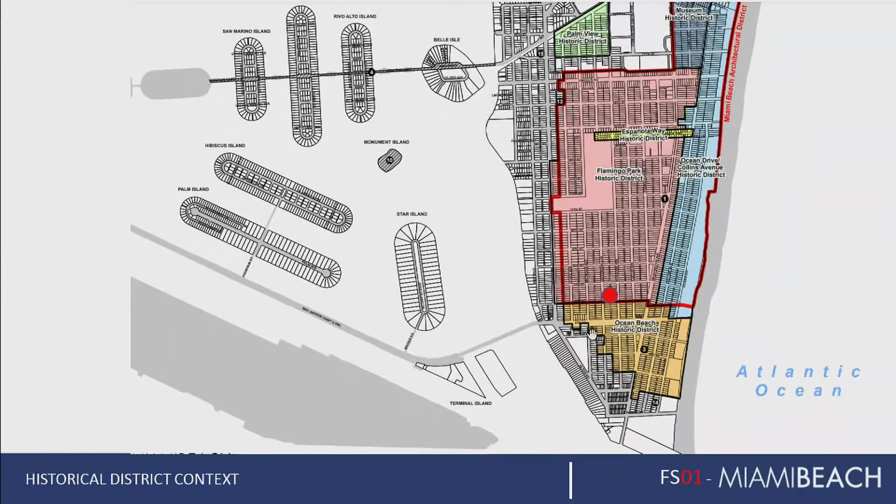Going back through this proposal, obviously the location falls right in between two different historic districts with Ocean Beach and Flamingo Park, right on the edge. Looking at characteristics within the neighborhood, we analyzed some of the contributing factors, but most of the references are directly from the site that we are using for our building.

From a site plan standpoint, this is the existing site. You see the location in dark gray of the existing building, the parking, and the access to the alley - that is all existing. Some of that alley access is remaining in place for the new project.

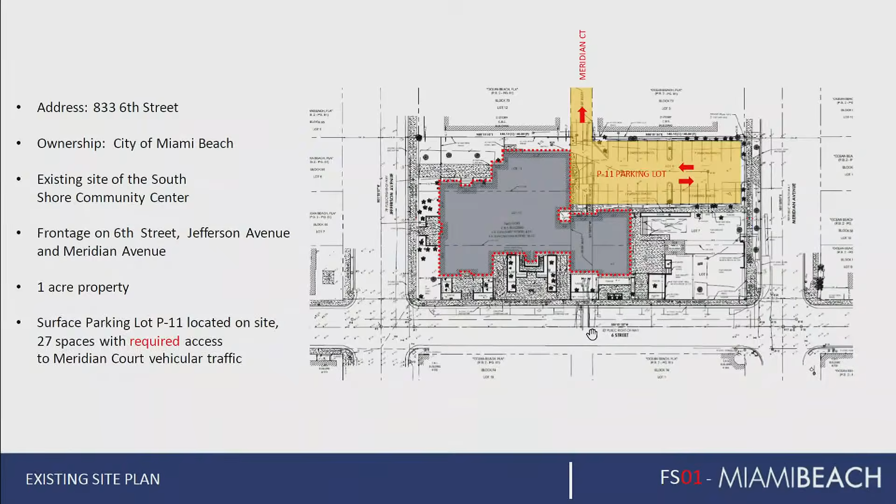Going specifically into the design elements, some of the details that are going to remain - we have some board-on-board detailing for the concrete stair railings that's going to be reimagined within the new building.

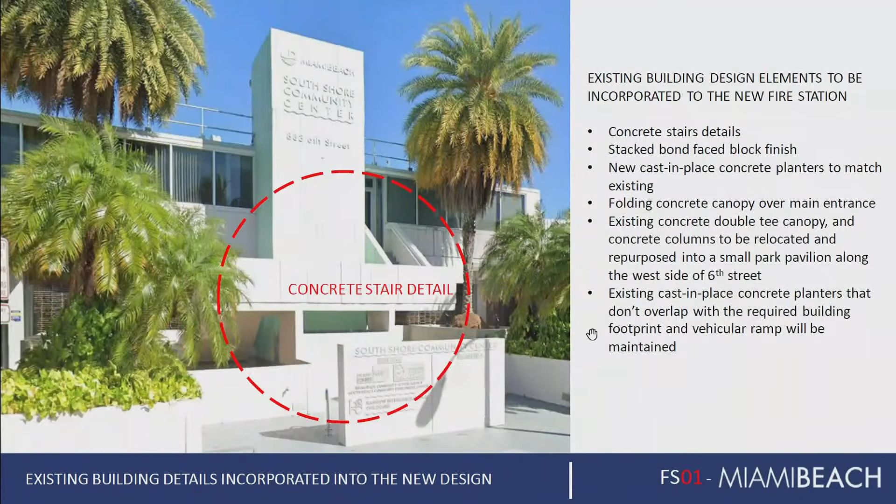We have stacked bond, we have the planters - a lot of these individual elements that we are maintaining or relocating within the new site. This is highlighting one of the planters; there are multiple planters along that row. I think that is really one of the contributors to the walking experience, so we're paying lots of attention to keeping that, including protecting some of those elements during construction.

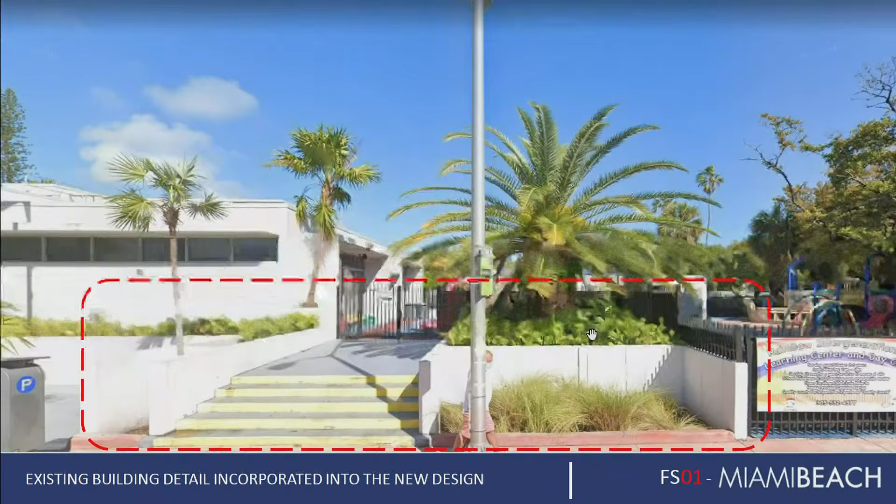Some of the structural elements, the double T's and how that's being held, are going to remain on site. We're actually going to relocate one of those and make a shelter out of that structure. And then in the rear, you can see some of the stack bond - we're going to use stack bond within the new structure and some of those unique planters.

Some of the shadow box, folding, concrete detailing, we're going to use that again in the same way to highlight the entry and highlight some of the window structures. And here you see in the renderings, some of those either relocated or maintained planters and the entry structure.

But on the left, in that structure, we're actually making a pavilion and a pocket park essentially on 6th Street. That's an opportunity that we can continue to develop with information about the original structure, but also potentially about the department. I think that is a community process, but we have some seating and some landscape that is going to buffer that area on the left particularly.

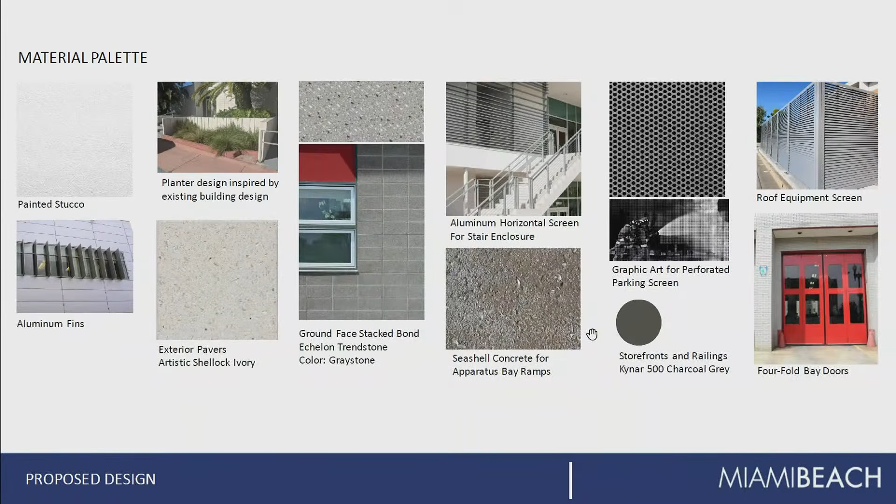Some of the materials being used: the brise-soleil, the planters, pavers, the stack bond is a ground face stack bond, so it doesn't need to be painted in the future, repainted. One of our sustainability factors.

All of the mechanical is going to be hidden from the neighborhood, and the one new aspect is the red fire doors. For that, another unique aspect is on the ground level, there's a perforated art piece integrated into the station as part of the entry sequence. That also shields any of the parking below the building so that you don't see that from the street.

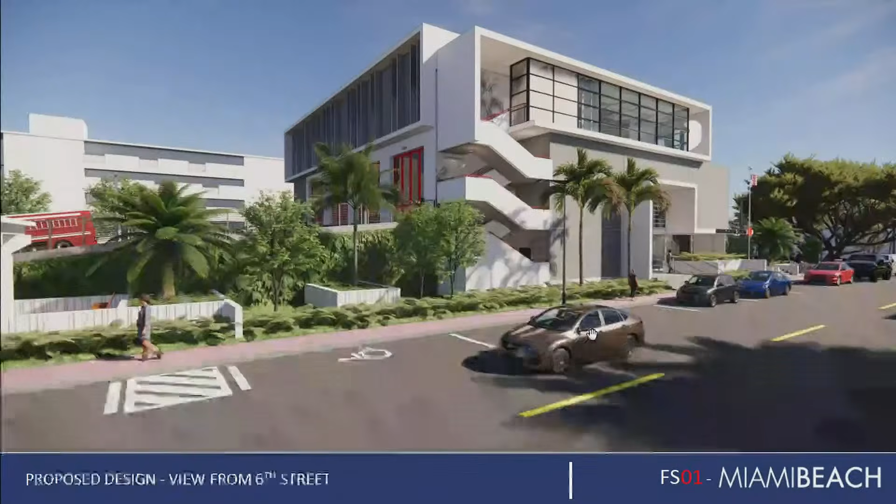From a water standpoint, we have 5 deep wells on site. We're vastly improving the water treatment on site, vastly improving the landscape on site. Currently you don't have any of that, so after this is completed, we will have a much better treatment of water and capture of water on site. Enhancing some of that landscape along 6th.

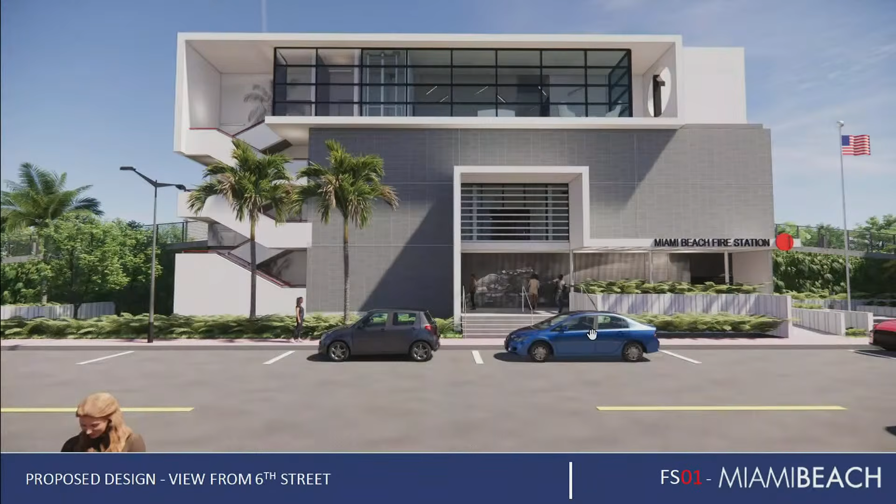You see some of the detailing in the stairs. You see how the shadow box around the entry is enhancing in a similar way to the original building, focusing on the entry into the elevators, and then that stair on the left-hand side, and the shadow box increases over the stair on the upper level as well to enhance and capture those windows.

See, you're looking to the northeast at this view, up 6th. And to the left, you see that pocket park where we're reestablishing that entry and recapturing some of those details.

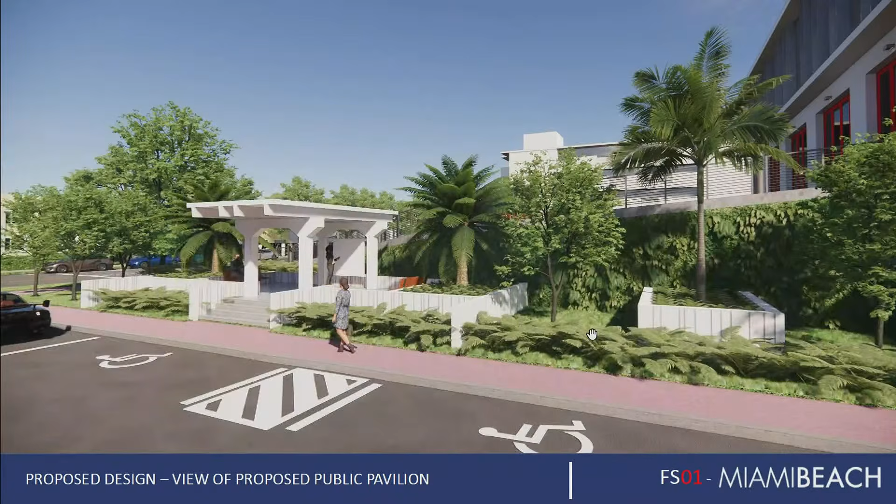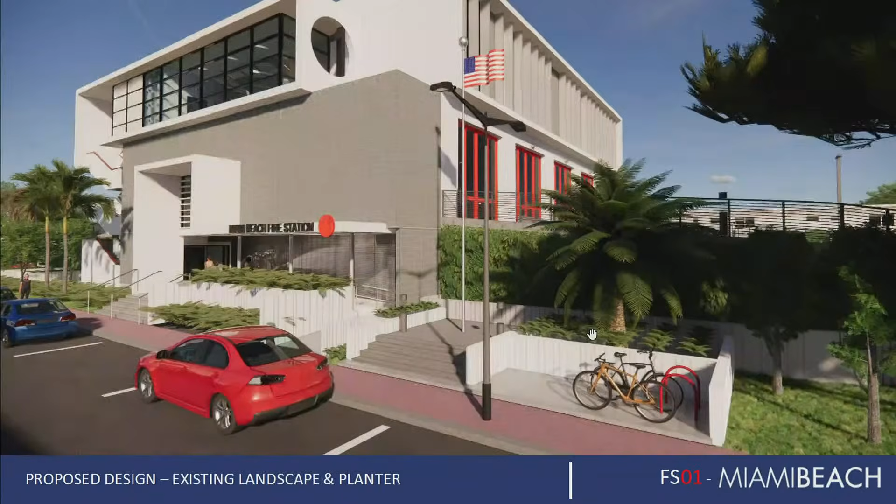Through the entry, you see that perforated material that hides any visibility of front to the parking lot. Some bike parking. The final entry. Some of the signage we're holding and capturing single letters with the signage on the brise-soleil.

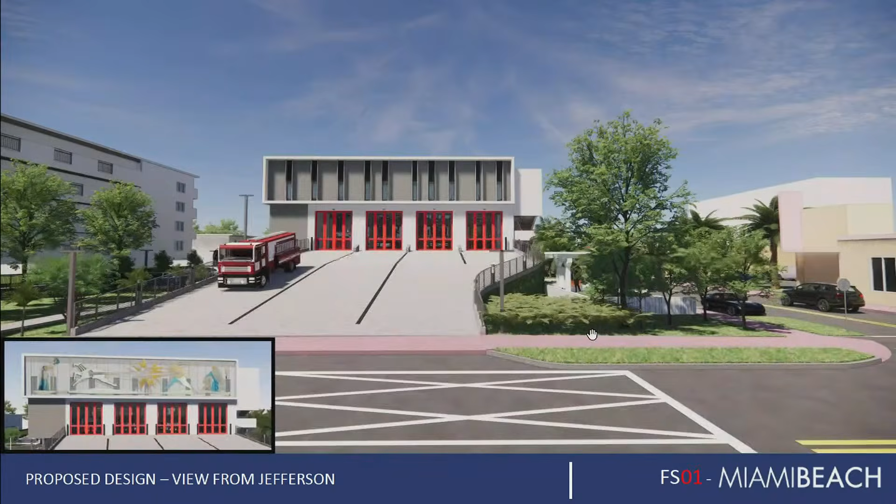And then this is looking southeast. So this is from Jefferson, and then highlighting to the left doesn't really capture the full view until you see the Apollo on it. But since these are two applicants, we'll show you, get deeper into the Apollo mural in a minute. And this is a bird's eye view from Meridian.

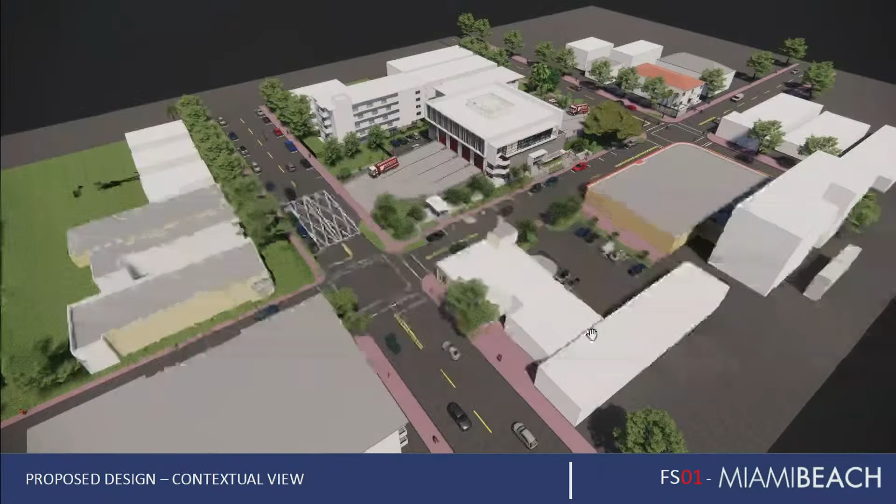If you were behind the building - we are not - there was a conscious effort to not be the back of the building, so we're looking to treat the building from all sides, using stacked bond again in the back, and then you see some of the access to the parking below. Bird's eye view of the whole site, and the front view.

So I'm just going to go right into the Apollo mural, since these are originally two different applications. We're excited as a team to be able to capture this. The size of the Apollo mural happens to be almost exactly the size of this building, so it was almost like it was meant to be relocated to this site.

So looking back at the history of Jack Stewart, accomplished mural artist, he actually invented new techniques for stained glass and mosaics, and I think that has allowed his work to really endure, both physically and visually over the test of time. He was a Yale graduate, also went to Columbia. He's worked in many different mediums, but obviously mural was his highlight.

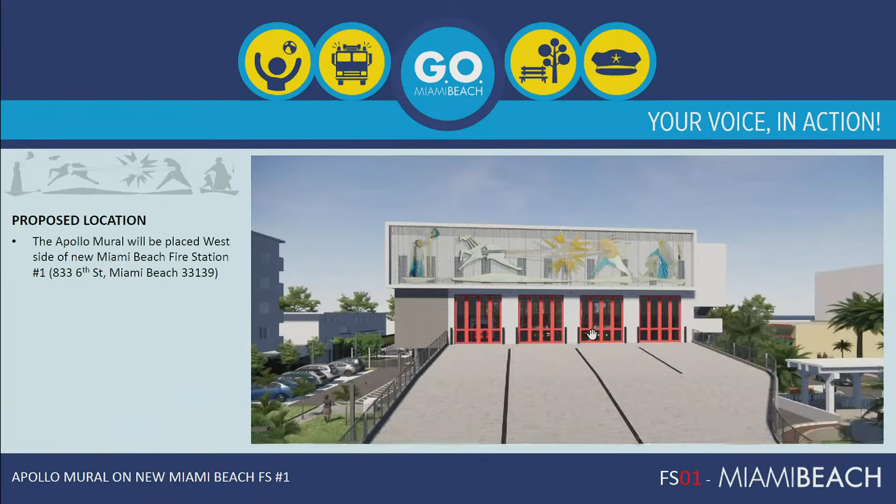And obviously there's meaning between the Apollo and running the chariot through this site, and the spacing and all of the original spacing and the sizing we're able to accommodate. So even though these are multiple pieces, we're able to suspend it as it was originally intended.

So it will be on the Jefferson side, so it's on the west side. I think that's important because you get north light versus south light, so it protects it a little bit more over time. And we're suspending it in front of the system, as it was originally suspended. So we have a frame system, essentially a perforated backdrop to it, so we get a nice clean look. We still do need to have some windows on that facade for the interior spaces, but we put the perforation to give us a clean slate backdrop for it.

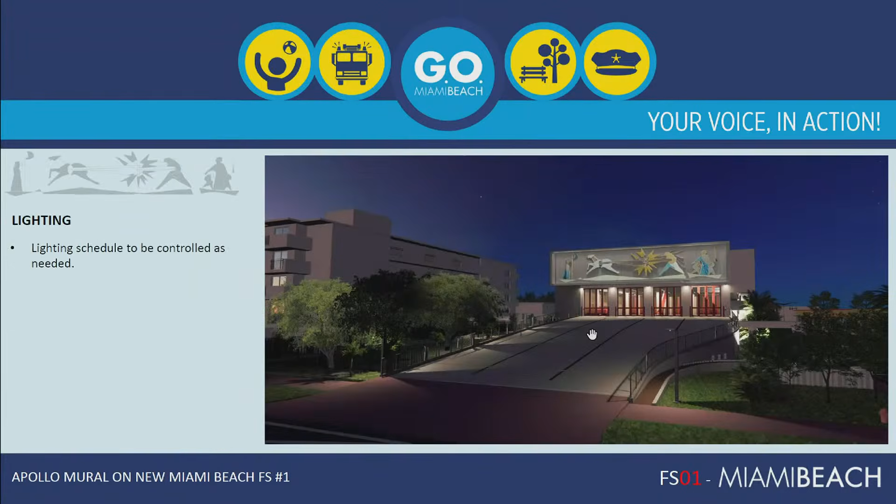We stand it off of the windows, and then we have a lighting system that's going to come in front of that to make sure it's seen properly in the evening. I think that will actually be the best time to see it. It's really fantastic. And the elevation of it, you'll see it as you drive down near this location, so it will have that elevated experience. The final sunset view.

So that concludes our application. I think we're excited to bring this project back to life. There's been a lot of effort gone with the board in the past to make tweaks and additions to this. They were made both in the landscape. We revised the railing detail. We incorporated some of those original materials, and capturing some of those original building elements were all things that you all brought to the table.

We in the city implemented, and we're proud of the outcome. Thank you. Are there any questions for the applicant? I think there's a comment you'd like to make that will amplify the application for us, and then we can have questions for the applicant.

Yes, thank you, Mr. Chair. I've cleared this with staff. I'd just like to make a little presentation on Jack Stewart's Apollo mural, Apollo driving his sun chariot across the sky. On the right, you'll see images in a short media presentation.

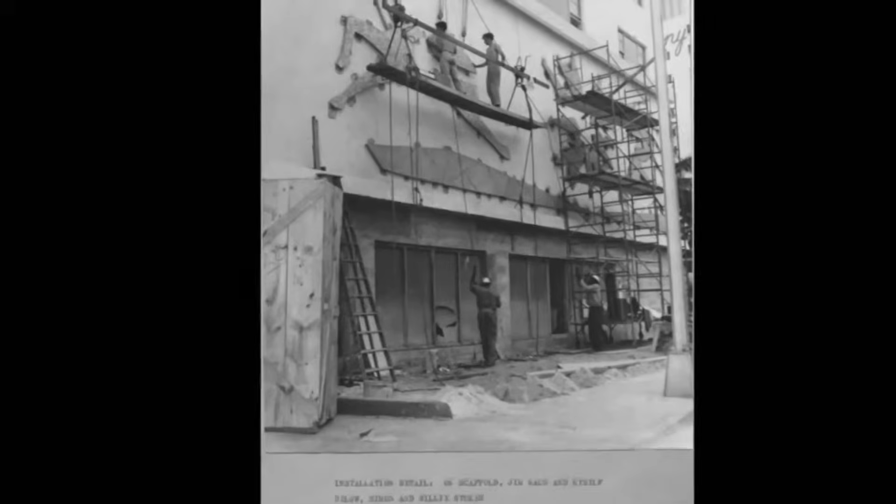Don't. What's the neighborhood feeling at this point? Well, I think there's plenty of people looking forward to a new state-of-the-art fire station going in, and then there's people who don't want to see the existing building go away. So it's still mixed. It may change a little bit because at the July HPB meeting, the fire station is going in front again for the mural that's going to go on the west elevation, and I did see a rendering of that. It really, really looks nice, and I think it's going to be a terrific addition to the fire station. I think that will hopefully get some people to lessen their animosity towards what's happening.

I'm sorry to interrupt. I can tell you that we're equally as excited. I've had some conversations with Mitch, and to the extent that the outer shell of the building can accommodate anything the neighborhood wants, I'm glad. I know he brought it up, and at one time I think he thought it may have been taken as a joke, but we were pretty serious about including it as part of the station, and then Maria got to work. I think it'll be a good addition, something the community can be proud of. Maria, you want to tell them, just in case?

I can speak a little bit about it. Mitch Novick and I were talking about this mural since we started the convention center way back in 2014 or 15.

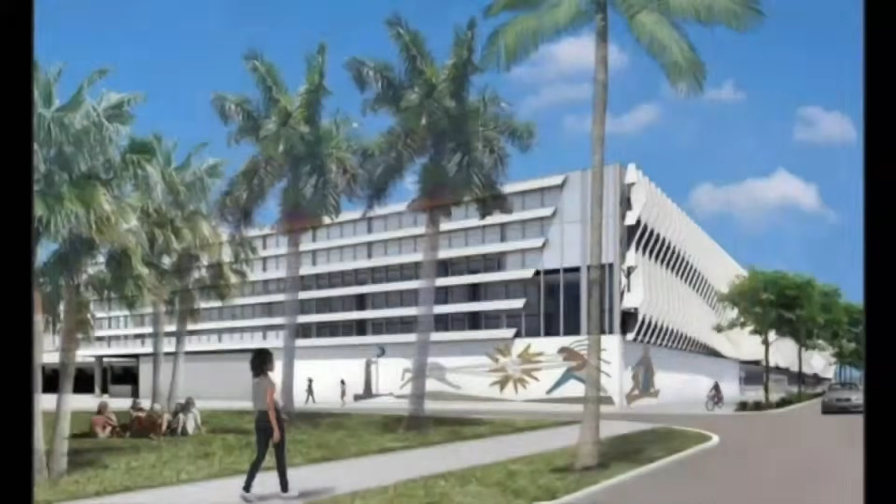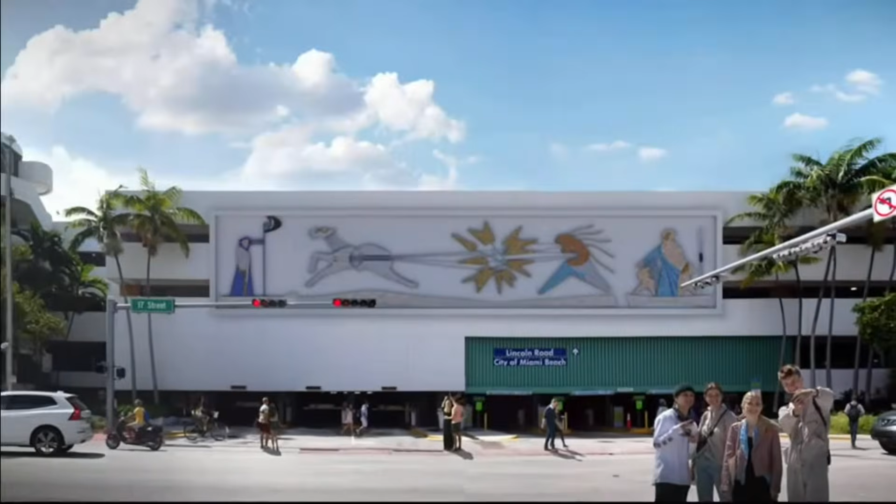It's called the Apollo mural, and it is the god of fire, or ironically, the sun or something. The mural was on a historic building that Faena purchased. For one reason or another, it got taken down and was going to be discarded, but the developer kept it and donated it to the city, agreeing to pay the majority, if not all, of the costs to refurbish it and put it somewhere.

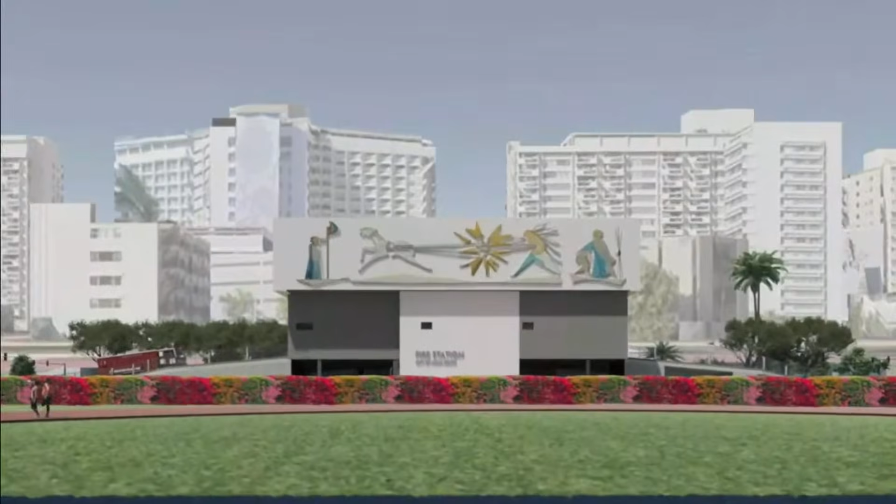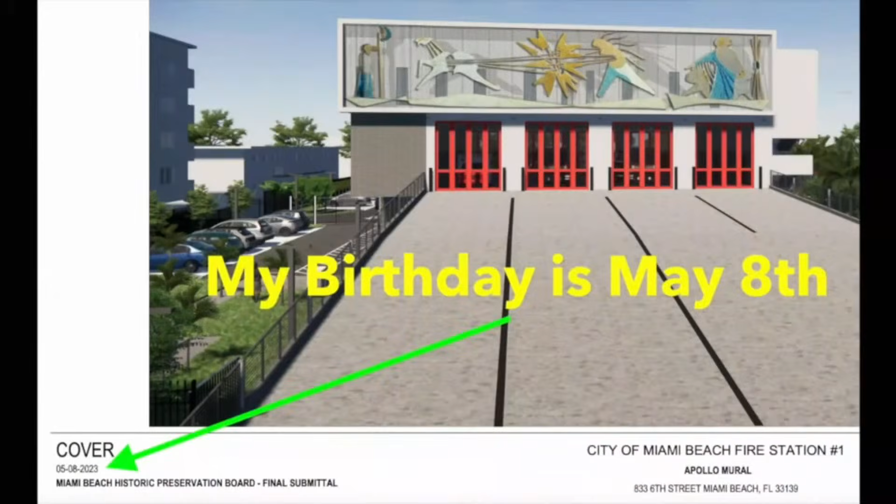And ironically enough, it's going to be on the facade facing one of Mitch Novick's buildings. It's crazy that it even ended up there, but it just did. And the fire department loved it when we showed it to them. So it's a win-win, really a community win-win. The preservationists win, the art people win. It's a win for everybody.

So we're really happy to have made it happen. It took a lot of departments - tourism, culture, David's department. Colette Satchel has struggled with this thing structurally, to put it on the building and get it up there. But it's going to go in front of HPB, so let's see what they think. It's really a great story once it's all put together.

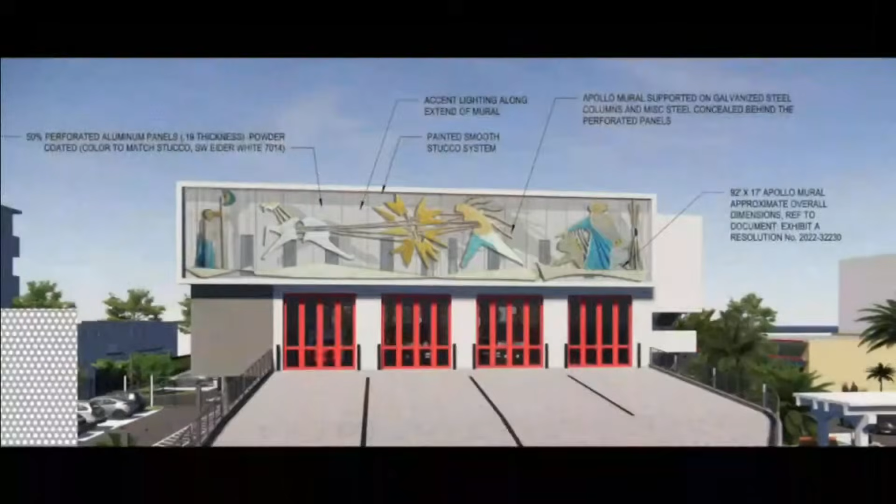And I think I saw Lauren. Were you trying to show us a picture of it? Yes, Colette and I met with Mitch Novick yesterday just to touch base about it.

It is a very cool story, and it is cool to see it - I love it that we're able to preserve some of these kinds of things together.

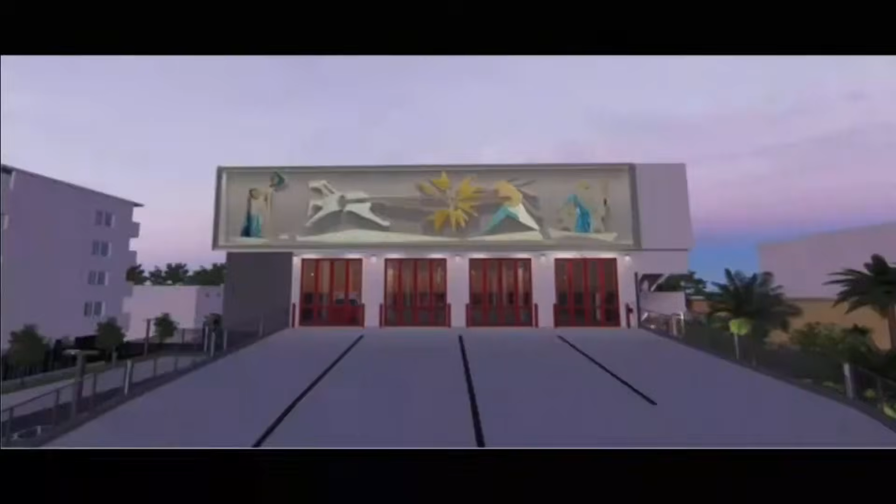Not to beat up on this anymore, but I did Google him real quick, and he's been recognized as a god of archery, music and dance, truth and prophecy, healing and disease, which I think is pretty appropriate - the god of light, poetry, and more. That's my all-around guy. That just sums up everybody in Miami Beach. It's great. Thank you, thank you.

Thank you very much. So I think that kind of concluded the presentation. But if we have questions for the applicant, maybe - I don't know if anybody has one. I definitely had one, but go ahead, Mitch.

Two questions. David, you mentioned you had the permit in hand - is that permit still active? We have reinstated the building permits and demo permits. Okay, that's good to hear. And the architect, you've mentioned a few times you're maintaining and relocating - does that imply replication?

Some elements are kept in place. The entry piece is being relocated. The planters are being kept predominantly in place. A couple where we are adding new planters, we're going to match the original.

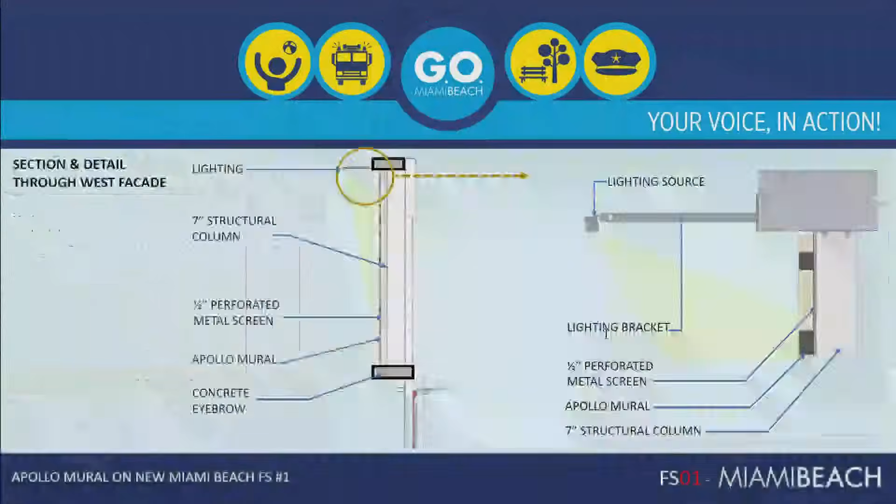Just give me a second to move back.

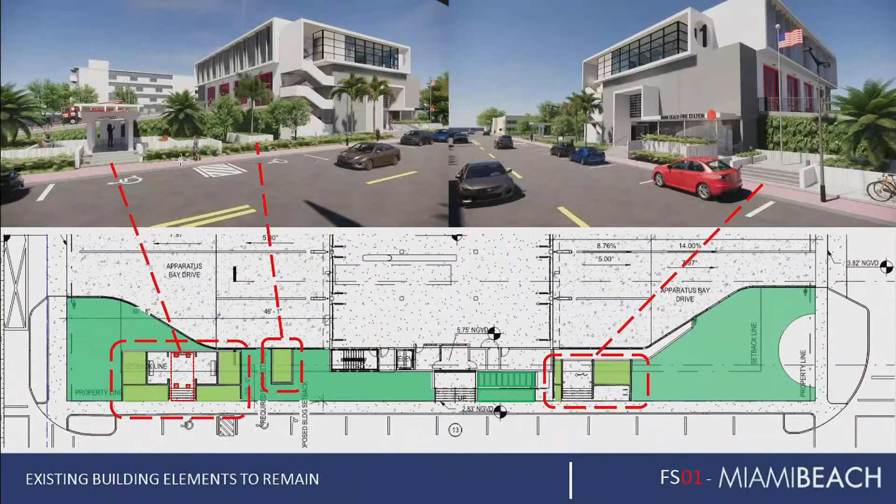So the vertical piece - I'm sorry, I'm having a hard time. Can you tell me where that piece is in the site, the proposed site plan? I think the confusion is that this is the proposed. Could you go back? No, I thought this was proposed. Could you go back to the existing, sorry - yes.

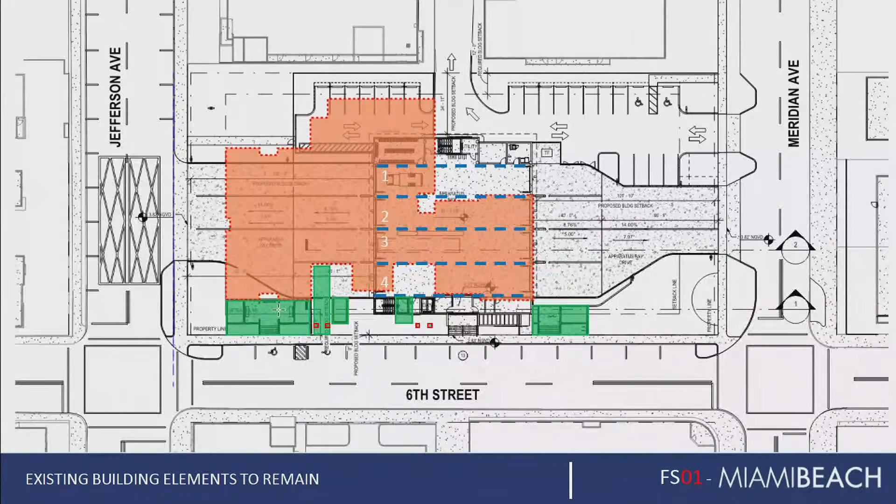And so this is the existing, and the only difference is - see where this red is, that's where that piece exists now. So that canopy exists in this location now, so we're simply taking it from that piece and relocating it to this. Show the photo.

Okay, let's see. Now I understand, just moving to the side - there you go. So to the left, the planters that are being maintained are just to the left of that. This made a lot more sense to just move it to in between the planters, and then it can be essentially a pavilion for that pocket park piece.

Thank you, and one more question. Could you go over the detail of the lighting above the mural? Okay, yes.

Okay, so this is a detail of that lighting. So the lighting, to get consistency with it and really highlight just the mural, it's coming directly off of the building with stanchions and then projecting back consistently to the mural from the face of the building. So from the top, it would come out and then come across the mural from the top.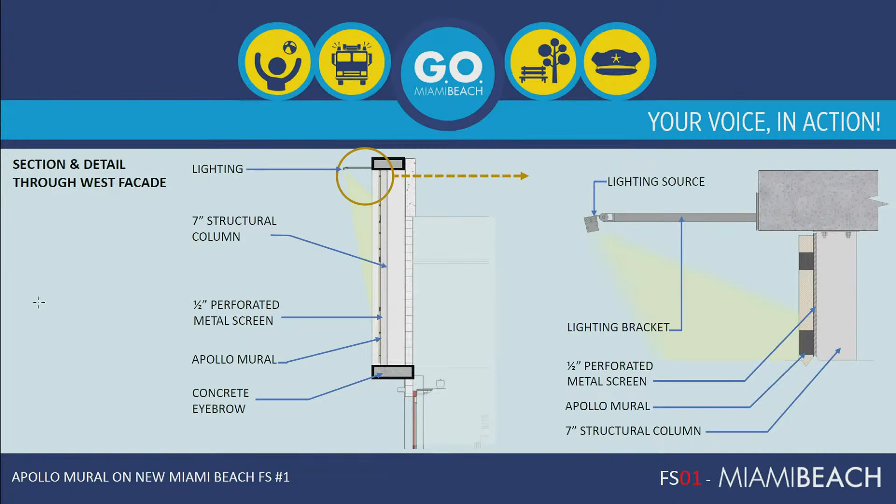How far out are those elements sticking in front of the support wall or element? You happen to know that? I'll say approximately 3 feet.

No, because in the video that Mitch showed of the existing structure, there's a frame on the top with a gap, a recessed area between the frame and the mural, which if you could reproduce the same detail would be a great place to put the lighting, and then we wouldn't have those elements sticking in front of the mural.

I'm not a lighting design expert, but I've seen things done this way, and I thought it would be a great opportunity to hide all that mass that may be created by having the light sticking out.

Okay, we'll certainly dig into the details for it. And I think our main concern is we want to make sure that we present it properly so that the mosaic pieces at the evening - we want to make sure that light comes out far enough that they don't create such a shadow that it takes away from that. But we will absolutely dig into the details of that.

Thank you. Mitch, did you have a question? Yeah. We're advisory in nature, so what is your time frame, even if we were to vote this down or, of course, approve it?

Without your approval, it would delay it a little bit. We would have to go back to commission for approval. We are looking at commencing construction of the temporary daycare facility this summer, and commencing construction at the South Shore Community Site end of this year, beginning of next. That would be the demolition of the facility.

And in terms of the construction of the new facility? It's about 1.5 years. Once we start at the South Shore site, it's about 1.5 years. So we're talking sometime in 2028?

2028. Okay, a question regarding if the mural should need servicing, not to interfere with the fire equipment, the vehicles that would likely be traversing below. How will that be performed? Is there a ledge, or will it be somebody rappelling? Well, so this station, two factors.

The apparatus bays have doors on both sides, so they're drive-through, which is a real advantage for the department, but it also allows them to exit either side. So if you need to actually access one, you can access it from the ramp, and the ramp is level at that point. So the apparatus can come out of the bays and fully sit on the apron without significant slope. So vice versa, if you need to have a lift to access the mural, you have a flat surface to do so. And the garage, that facility, it's straight through.

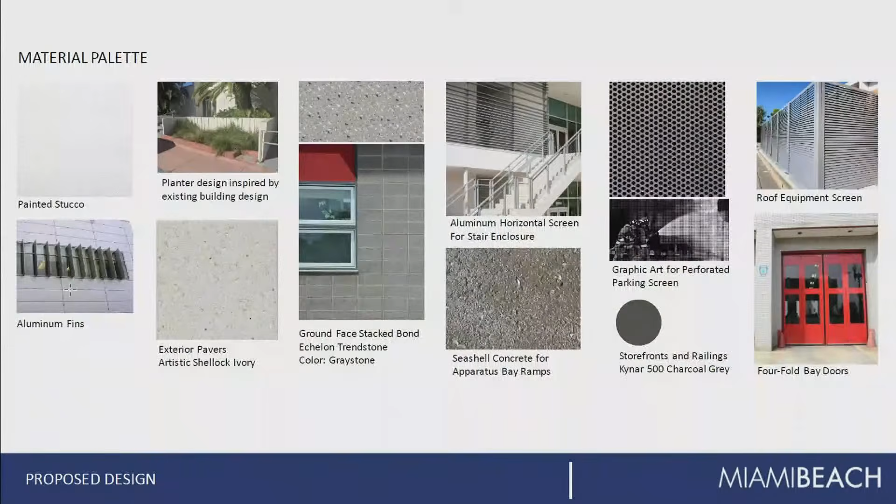Right, we could, that's not a final selection. So we can certainly continue to look at that. It is balancing having natural light into those windows, but maybe there's potentially a screen where the openings are more directional. So we can certainly look into that.

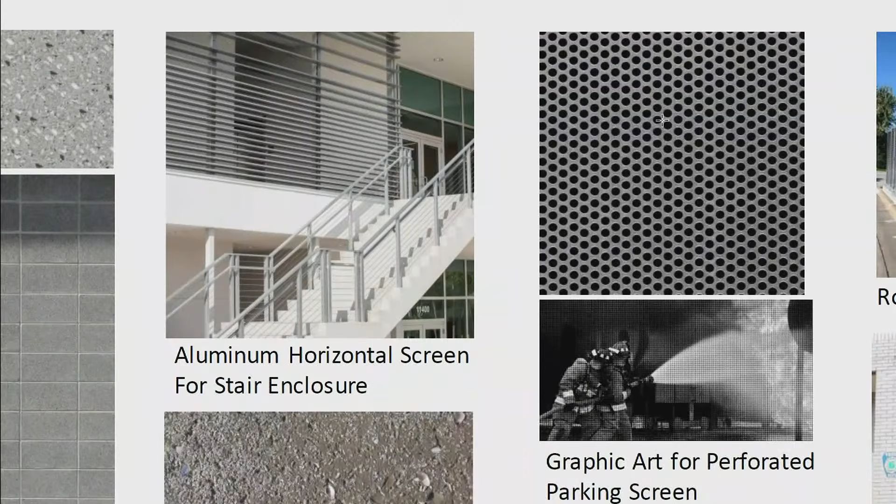Okay, I mean, I've seen a lot of screens where you really can't see through it. The surface of the screen takes over your eye versus what's behind the screen. Right, you're correct though, like the light conditions, we want to put a lot of light in front of it, for a lot of those same reasons. So we really want to project in front of it. But that's certainly something that we'll analyze and look even on site to finally make a final selection. But I think it's a good comment.

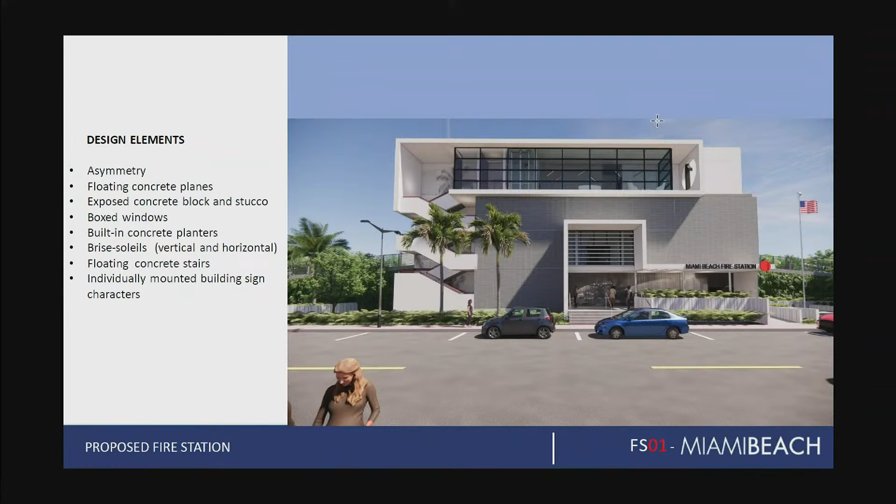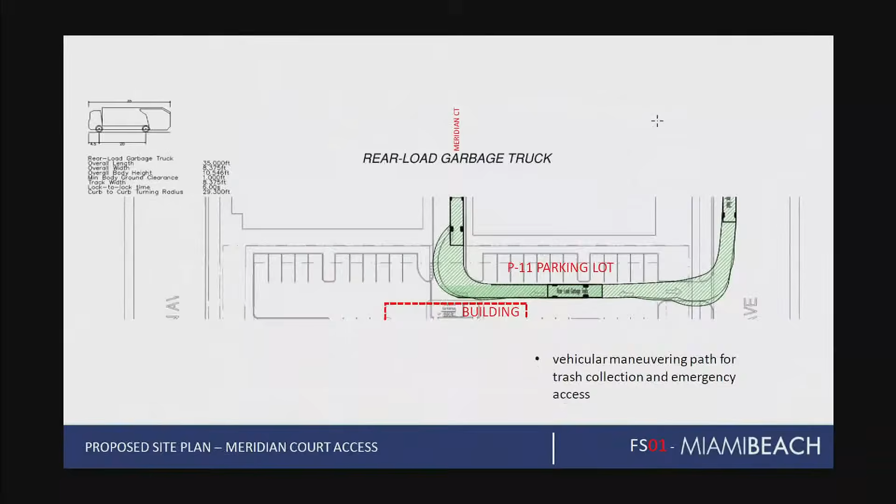Okay, thank you. Can you put the site plan up again, the new site plan? I don't understand it very clearly. It's kind of a graphic. Yeah, that's hard to understand. Where's the Vest Pocket Park? I don't understand the plan well enough to understand where you say there's a park.

It's a little deceiving when you say it's a Vest Pocket Park when I consider it just to be basically landscaping around the building. It's not a park you would go to. There's no grass. Your landscaping on your renderings is extremely dense. The term pocket park is more of an urban term, it does have seating, it does have some attraction to it, but it would be more of a respite along 6th than just a destination, a side place to sit off the sidewalk.

Right. Okay, thank you. Thank you. Is that it? Yep. Okay, thank you.

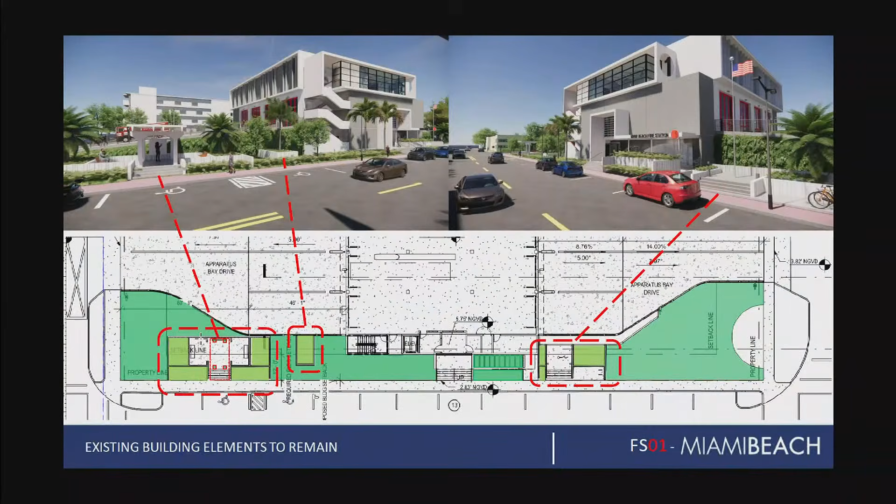Lindsay? Well, I think my question was going to be for Chief, but she has stepped out. So she's coming back? Okay. Yeah, I mean, I guess my question, and Eric, I don't know if you can speak to this or not, is the fire department happy and ready to go with this? I mean, that's honestly my biggest concern at this point.

Hi, good morning everyone, Eric put you on the spot. Representing the Miami Beach firefighters, the union, I can tell you as far as the union body, all our firefighters were ecstatic that the commission voted unanimously to move this forward. So I could say on behalf of our membership, absolutely, and I think it's very beautiful also. Mitch, thank you for promoting the Apollo mural, obviously it's very fitting that it would land at the fire station.

Apollo being the sun god, the god of medicine - and I have to take a point of personal privilege. This is my dog, his name is Apollo. So even though I'm away from him for 24 hours, I'll have the idea of him at the fire station.

So thank you for not letting that amazing piece of artwork just get thrown away. We're, as a membership, very excited to see it. So Chief, my question - sorry, I was in the bathroom. I couldn't... how dare you?

My question was really, are you guys happy with where we are with the design and the structure of it and all that? I know we've been waiting a long time for this, I just want to make sure where you guys stand. No, absolutely, it's a great opportunity to circle back and get this project going so we can have a new home. And I am a total fan of the Apollo mural - I've been thinking maybe we can have T-shirts, but I'll push it. Okay, thank you, great, thank you.

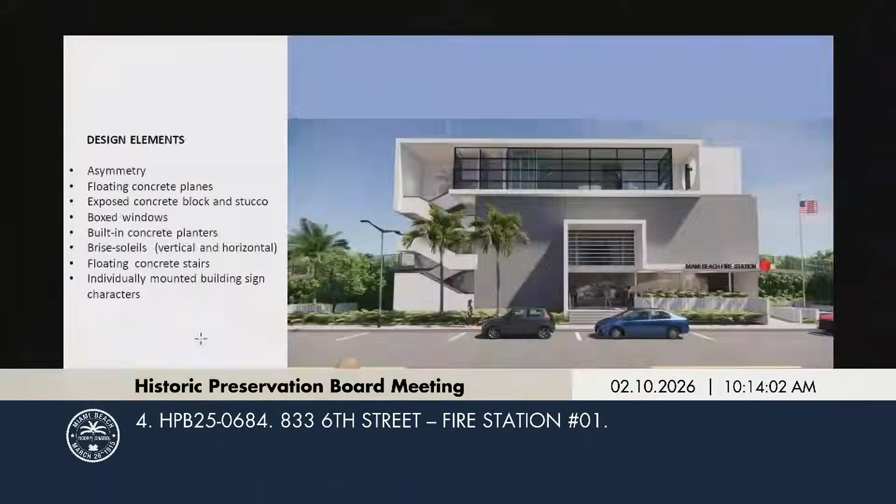I had one last question - I was going to follow up on Randy's. Can you put the section up with the mural, Randy's question, just where - because you had two scales in that section, a close-up and a... yeah. So on the right side, the perforated screen, I guess it's a 1/2 inch perforated metal.

So that means how far are the perforations from one another? Do you have any idea about that? There's two different conditions with that - you have the size of the holes, and then you have the size of the spacing between them. Exactly, right, so the spacing between them is what I'm asking about. I don't want to misspeak on that, I don't know exactly, but it's typically less than the 1/2 inch. So if the holes are 1/2 inch, then it's 1/4 inch between, just depending on the punch apparatus.

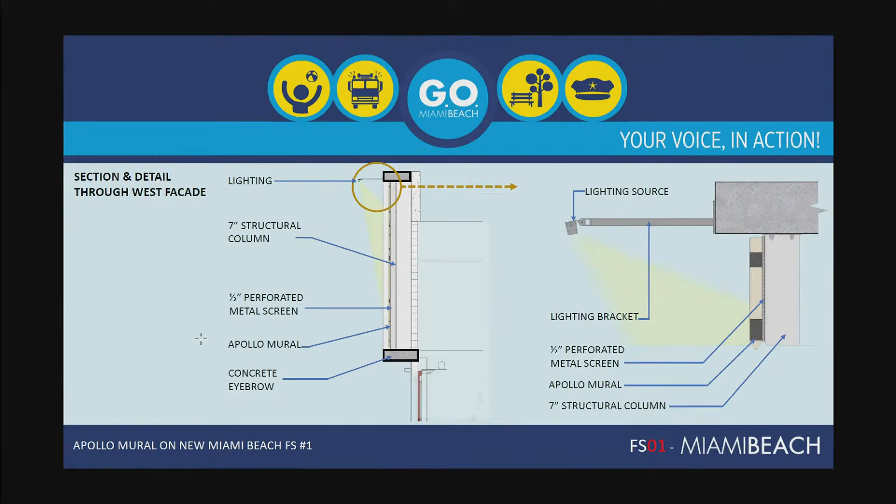So is it more open than dark - is the sheet that's the background of the mural 50% transparent? Based on the comments today, I think we will reevaluate the 1/2 inch and reduce that to a smaller condition.

Okay, thank you. I do think that also for heat gain it could act as - if it's on the west facade, it could help those offices behind it not gain heat in the afternoon when it's the hottest and the brightest sun. Absolutely.

Okay, I had one other question - this is because you mentioned 2 applications, I'm not sure that's actually accurate, so I was going to see. Originally. I understand, but I was just making sure that now it is one, and in the order I was going to make sure the mural is specifically addressed. I just see the word mural, I didn't see in the order itself - it says the murals, so I didn't know whether it should articulate the mural you're talking about. Yes, it should. Let me make sure - it's on page 206 of our order, 1D.

I'll take a look at the prior order on the mural, and see if we're missing anything, and I'll let you know before we finalize the approval of this application. All right, great, thank you.